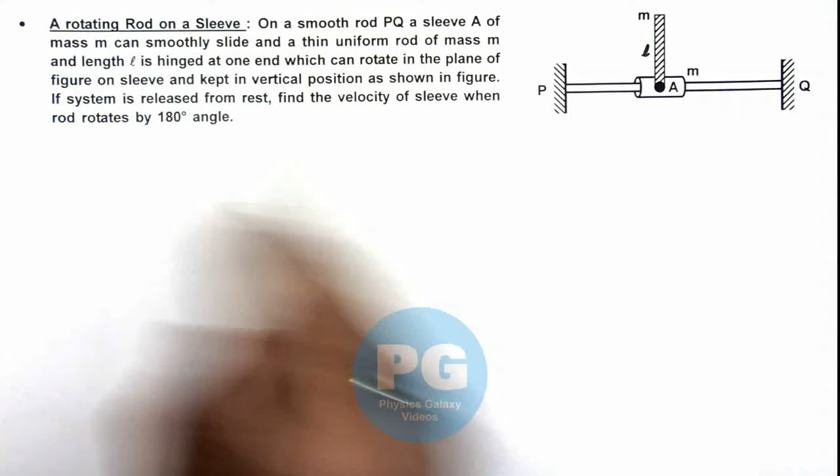In this illustration, we'll analyze a rotating rod on a sleeve. Here we are given that on a smooth rod PQ, a sleeve A of mass M can smoothly slide, and a thin uniform rod of mass M and length L is hinged at one end, which can rotate in the plane of this figure on a sleeve, and it is kept in the vertical position as shown in figure.

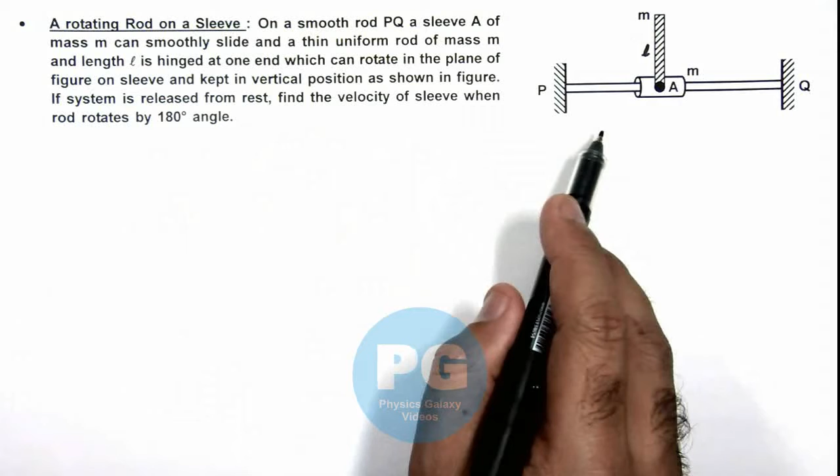And it is saying if the system is released from rest, we are required to find the velocity of sleeve when the rod rotates by 180 degrees. So in this situation, if we release the system from this position, the rod starts rotating, and here we can see if this is the situation when the rod becomes vertical, in this situation, and this sleeve A.

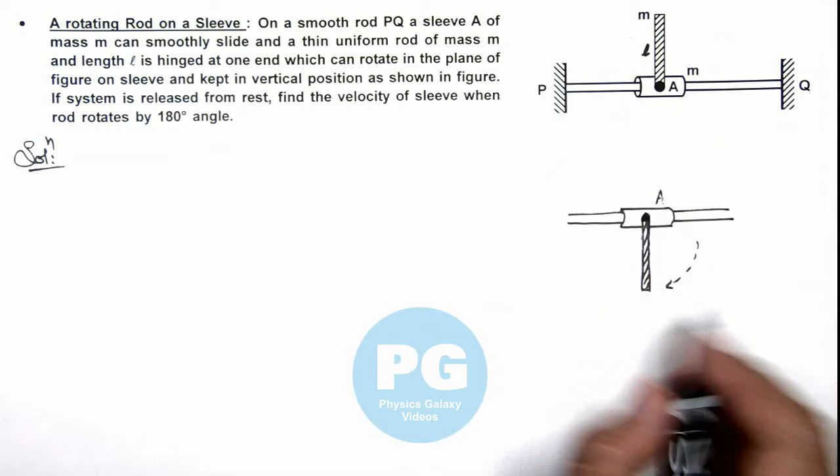So when the rod, if we consider, was rotating from the right side, and this rod is moving at an angular speed omega, we can consider that the sleeve would be moving toward right with the velocity v2, and we can consider v1 as the velocity of center of mass of this rod.

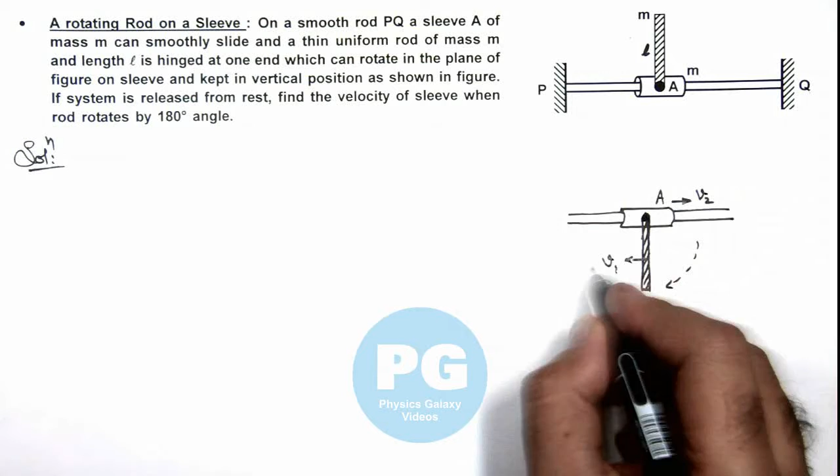As no external horizontal forces are acting on the system, the linear momentum of system must remain zero because initially it was released from rest. So here we can write, by conservation of linear momentum, as the mass of rod and sleeve both are equal, that means V1 should be equal to V2, as the center of mass of the system must be horizontally at rest.

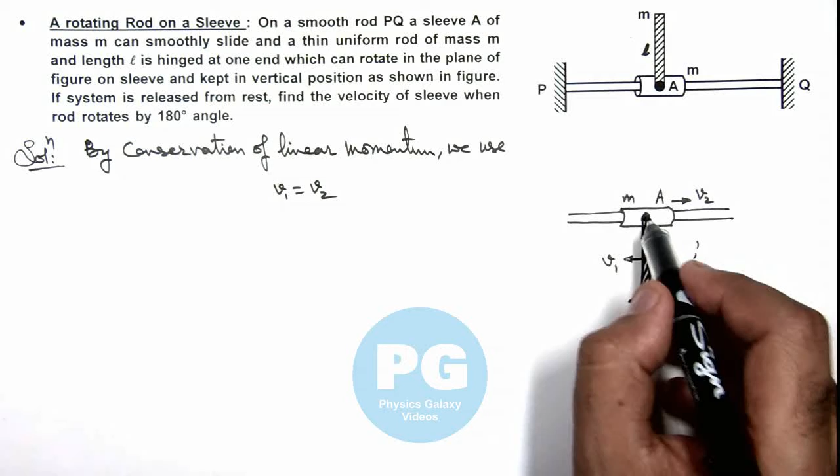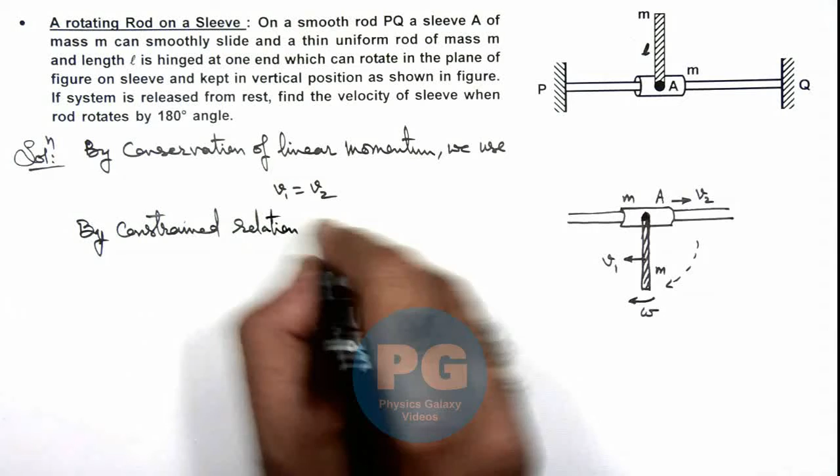Also, if the center of rod is moving toward left with the velocity V1 and it is rotating at angular velocity omega, then the velocity of this point of rod which is attached to sleeve can be given as L by 2 omega minus V1, and that should be equal to V2. So we can write by constraint relation between rod and sleeve, L by 2 omega minus V1 should be equal to V2, as one point will have one speed only.

And we can also write by work energy theorem: initial kinetic energy of system was 0, plus when the rod has fallen down by 180 degrees, its center of mass is displaced down by 2L multiplied by 1 by 2, as its center of mass was at L by 2 and this has fallen down by L by 2. So this will be mgL, which must be the final kinetic energy of the system.

For the sleeve it is half m v2 square, and v1 equals v2 we can substitute as v. So it is half m v2 square, plus for the rod it is half m v1 square, plus the rotational energy which is half mL square by 12 multiplied by omega square. So if we substitute v1 equals v2 equals v, on substituting the values we get mgL equals mv square plus mL square by 24 multiplied by omega square.

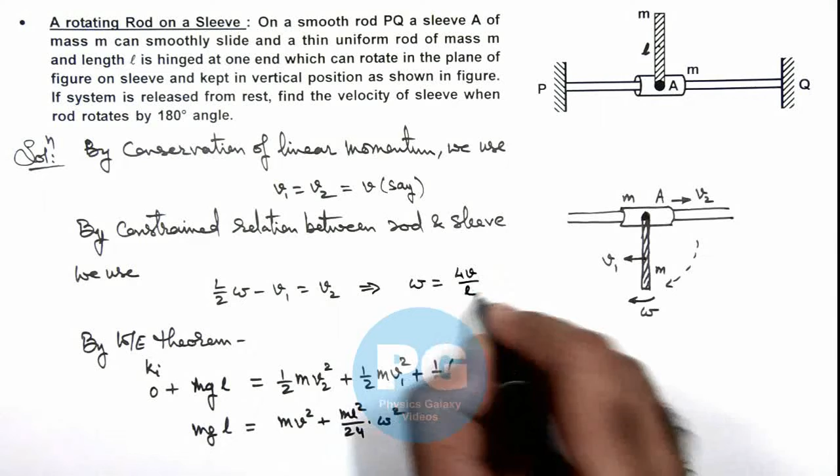And the value of omega, from this relation, we are getting as 4v by L. And if we substitute the value of omega over here, we can see the value of v, the velocity of sleeve, or v2, is given by root of 3gL by 5. That is the result of this problem.